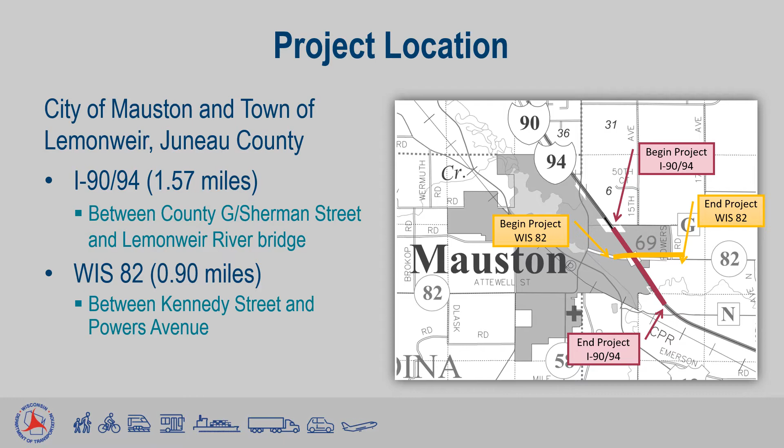The project will also reconstruct WIS 82 underneath the interstate overpass. The limits of this work are also shown above, from the east side of Kennedy Street intersection at Kwik Trip to the Powers Avenue intersection. The purpose of this project is to address operational, roadway, and safety deficiencies of the WIS 82 interchange with I-90/94. The need is to increase WIS 82 interchange capacity, improve pavement conditions on I-90/94 and WIS 82, address substandard and deteriorating bridge structures, and improve safety on I-90/94 and at the WIS 82 interchange.

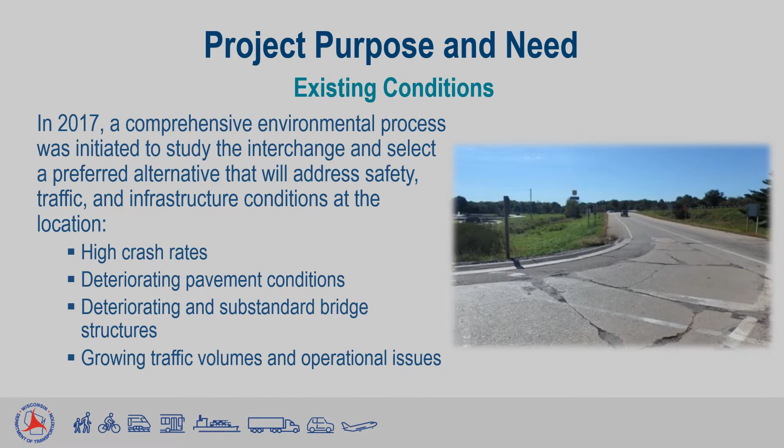Next, we will present the proposed improvements. The mainline I-90/94 ramps will be reconstructed and roundabouts constructed at the ramp terminal intersections. The bridges over the Lemonweir River, WIS 82, and westbound County G will be replaced. WIS 82 will be reconstructed between Kennedy Street and Commercial Street with modified lane configurations. Between Commercial Street and Powers Avenue, the pavement will be resurfaced.

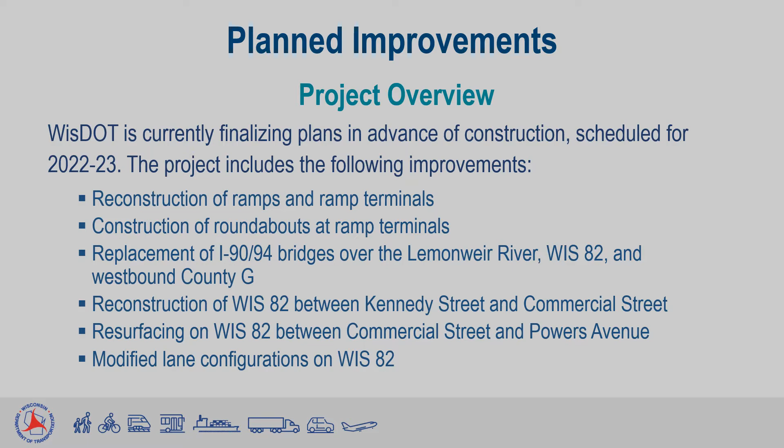Specifically, on mainline I-90/94, the pavement lanes will be replaced with new concrete pavement on an improved vertical alignment that will allow for increased vertical clearance under the WIS 82 overpass. The existing 4-lane configuration, 2 lanes in each direction, will be retained in the finished project. The 2 WIS 82 bridges, the 2 Lemonweir River bridges, and the westbound County G bridge will be replaced with new bridges. The eastbound County G bridge will receive a concrete deck overlay on its driving surface to extend the service life of this bridge.

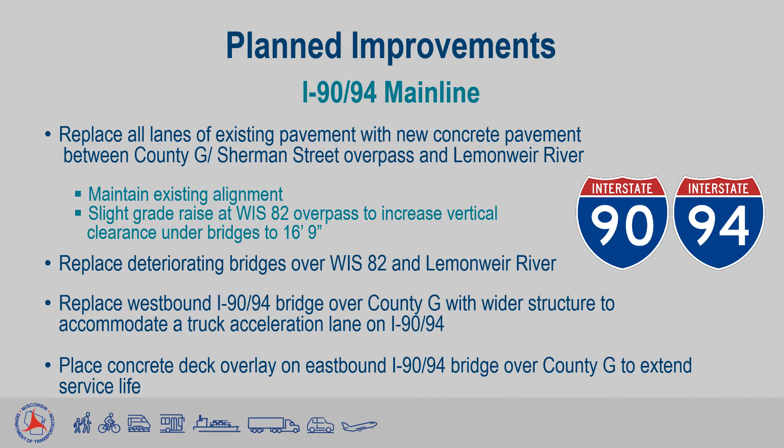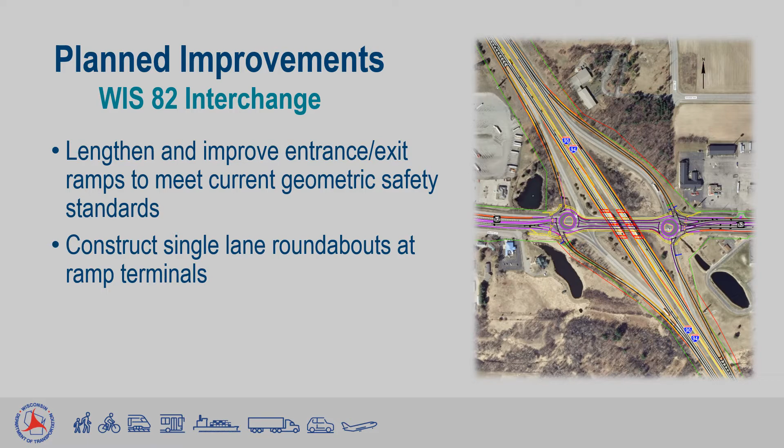To meet current geometric safety standards, the ramps will be lengthened, which will allow more length for vehicles to gain or reduce speed, and more room to queue for the ramp terminal intersections. As mentioned previously, the ramp terminal intersections at WIS 82 will be roundabouts. The WIS 82 roadway will be improved with new concrete pavement from the east side of Kennedy Street intersection to the east side of the Commercial Street intersection. The section of WIS 82 between Commercial Street and Powers Avenue will be milled and overlaid with new asphaltic surface.

The existing 2 lanes in each direction on WIS 82 will be replaced with 2 lanes outside the ramp terminal intersections. East of I-90, 1 lane will be a through traffic lane. The other lane will accommodate turning movements and additional turning queue storage capacity. The roundabouts themselves and the roadway between the roundabouts under the WIS 82 bridges will accommodate the single through lane. The configuration meets existing and design year forecasted traffic needs for through traffic and turning traffic on WIS 82.

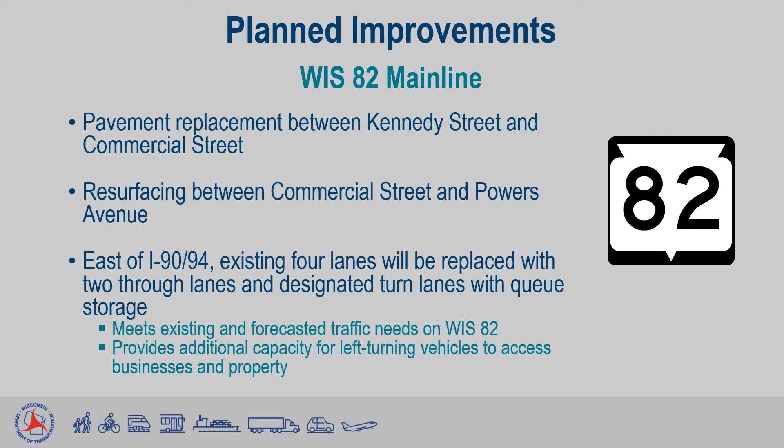The Commercial Street intersection will be replaced with a similar stop sign control as existing. The eastbound and westbound turn lanes on WIS 82 for this intersection will be improved to line up with each other. This will improve sight lines for left-turning vehicles to see oncoming through traffic, which should increase safety for these movements. Sidewalks will be replaced in the immediate vicinity of the ramp terminals and under the bridges and will match into existing sidewalks on each side.

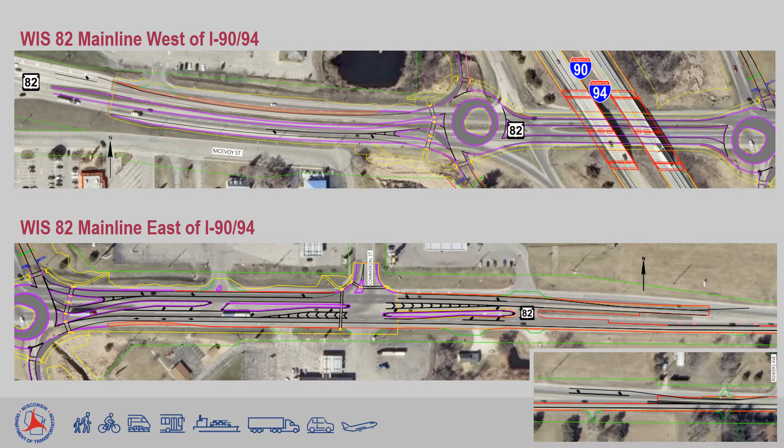The proposed work will mainly be contained within existing right-of-way of I-90/94 and WIS 82. There will be some strips of additional right-of-way needed, mainly along the ramp areas for the improved geometric configuration. The real estate acquisition process has begun and landowners whose parcels are involved have been contacted. If you are a landowner that has not been contacted at this time, then your property is not anticipated to be impacted.

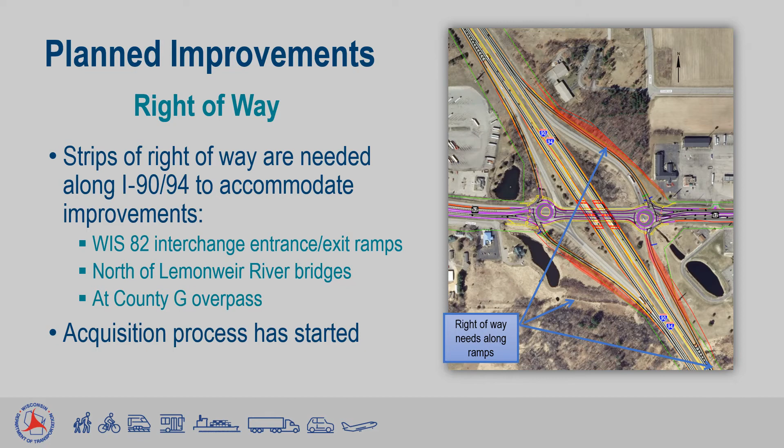During construction operations, 4 lanes of traffic will be maintained on I-90/94 for the majority of the project duration, that is, 2 lanes in each direction. In order to do this, temporary roadway and temporary bridge structures located within the I-90/94 median are being constructed at this time, in 2021, under a separate LET Phase 1 Project ID 1016-05-80. During isolated short-term periods, mainline traffic on I-90/94 will be reduced to 1 lane in each direction using nighttime lane closures. This will be required at times, mainly for the installation and removal of the median temporary roadway and structures.

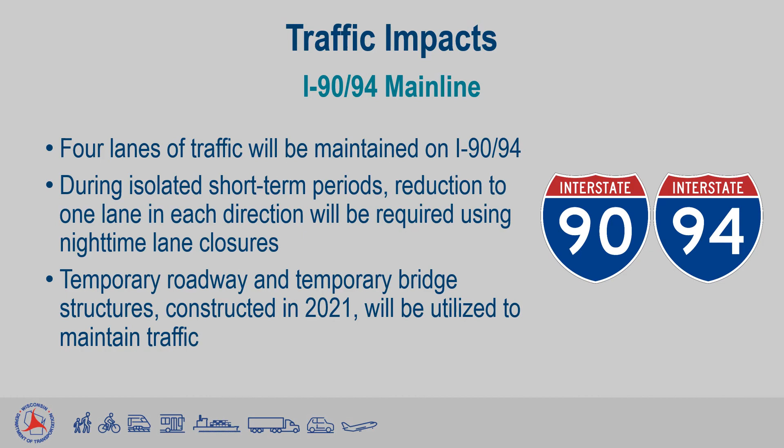For the WIS 82 traffic control between Kennedy Street and Powers Avenue, the construction will be performed in stages while maintaining at least 1 lane in each direction during almost the entire duration. In the area east of the East Ramp terminal intersection through Commercial Street, staging will maintain 2 lanes in each direction during almost the entire duration. The WIS 82 work is planned to start in 2022 and to be mostly completed in 2022. There will be several short-term nighttime closures of WIS 82 required for safety under the bridges. During these isolated nighttime periods, a detour will route traffic up the adjacent ramp towards the next interstate interchange and back to Mauston on the other side of the interchange.

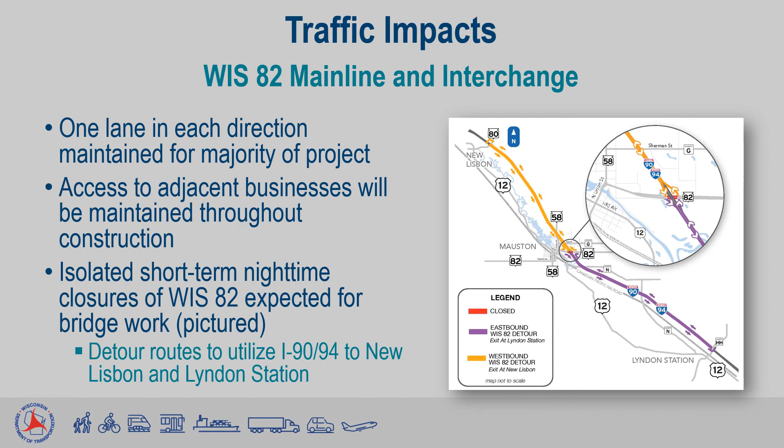The above timeline shows the anticipated construction to be completed in each of the upcoming years. As stated earlier, Phase 1 construction is already underway in 2021 on the median temporary roadway and temporary structures on I-90/94. Phase 2 will be completed in 2022, in which the eastbound I-90/94 live traffic will be moved over to the temporary median roadway and bridges, while the eastbound permanent lanes and bridges are constructed. Later in 2022, traffic is anticipated to switch over to the opposite side and median, which will allow the westbound I-90/94 bridges to be built.

In Phase 3, in 2023, traffic will again be shifted over to the temporary median roadway and bridges, while the westbound permanent roadway and ramps are completed. In late 2023, the temporary median roadway and bridges will be removed and the permanent median will be restored to final conditions. As stated previously, the majority of the WIS 82 work is planned for one construction year in 2022 using staged traffic and lane closures.